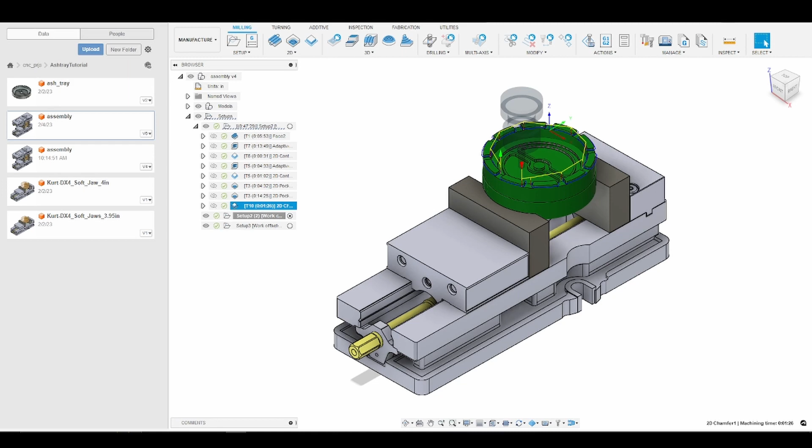So what I'm going to do now is go to my second setup, and I'm going to add a 2D pocketing operation. I'm going to navigate to the tools, go to my Tormach library, and we are going to choose the 3/8 inch Gorilla Silverback. Select OK. Our speeds and feeds are 7,500 RPM, 30 inches per minute. That gives us right at 1.3 thousandths per tooth. Again, 3/8 inch end mill. No chip breakers on this. This is my finishing end mill.

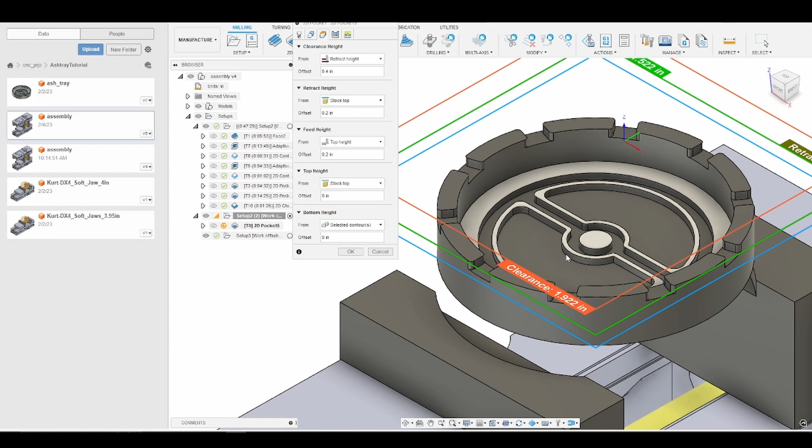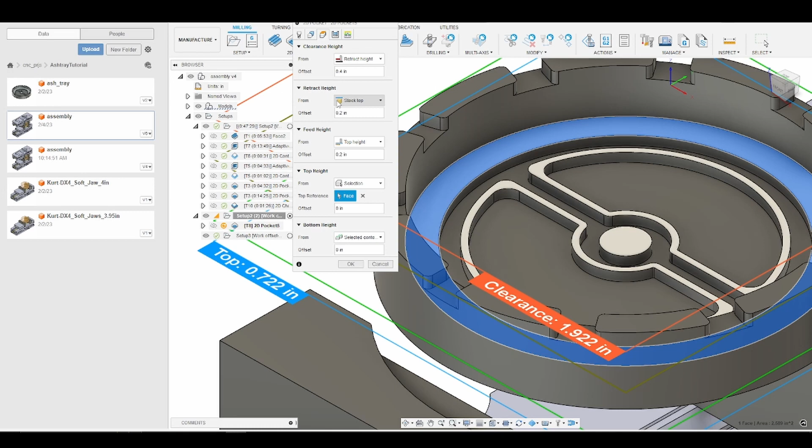So what I will do now is go to geometry. We just want to select the outside of the bottom surface of our ashtray. So I'll select that contour now. We'll go into our heights tab. And again, from the previous tutorial, we discussed a little bit about preventing the cutting of air so that we don't increase our machine time. We know that all the material that's inside of the ashtray has been removed. So for my top height, I'm going to go to a selection and we're just going to select that top surface there. And then we will go to our passes tab.

So I want to perform a finishing pass, and I want my finishing step over to be 10 thousandths. And the next thing I want to do is change my maximum step over to be 50% the diameter of the tool. So I will enter that now. Again, usually keep that between 18 and 75% the diameter of the tool, just to prevent any sort of cusp from forming while you're doing the pocketing operation. We do not want to leave any stock, and we will go ahead and enable smoothing and feed optimization. Okay, compensation type in computer is fine.

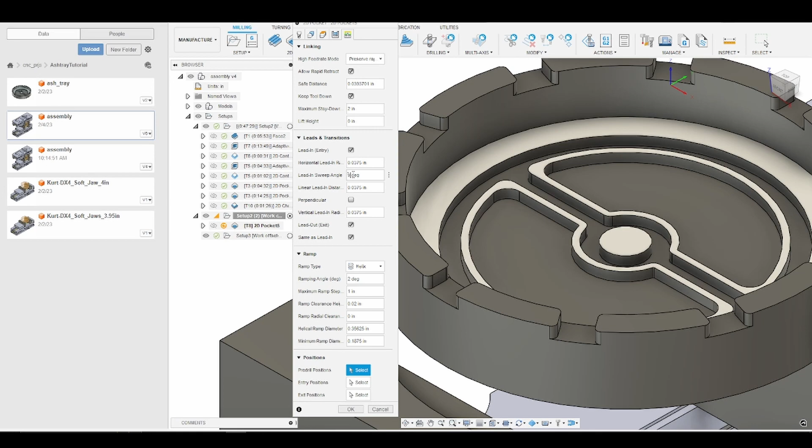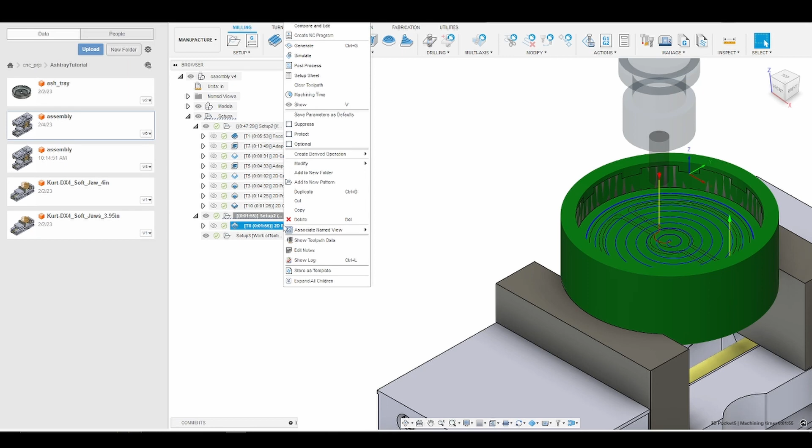We'll go to linking. Again, we will change our ramp clearance height to 20 thousandths, just to minimize cutting air to save ourselves time. And we will change the lead-in sweep angle to 45 degrees and press OK. Our tool path should be generated for us. As you see, it's just a nice clean circular motion. So the end mill is going to helical in about 20 thousandths from the top of our bottom, and then just go in a circular fashion or a spiral out, and then machine the sidewalls and finish it all. So we're going to go ahead and simulate that just to make sure we didn't do anything dumb. Press OK.

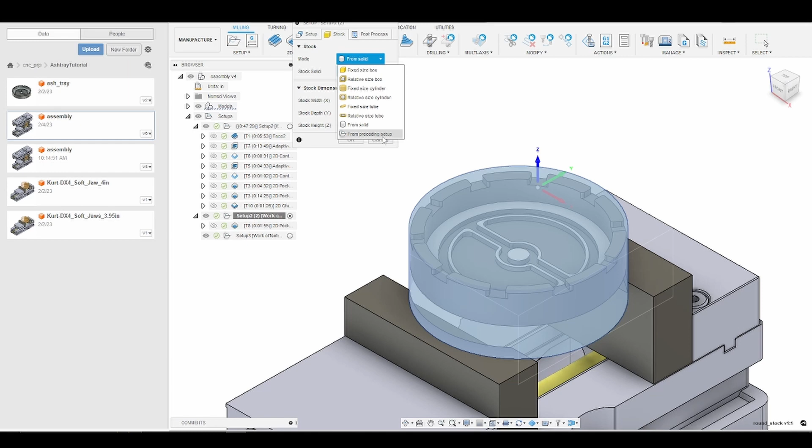And you'll notice that our stock did not update from the previous operation. So what I want to do is just right click in the setup, edit, go to stock, and I don't want from solid, I want from preceding setup. Press OK, check continue rest machining. Okay, and so now our stock from the previous operation has carried over, and so we will go ahead and regenerate the toolpath. And then we will right click and simulate the toolpath again.

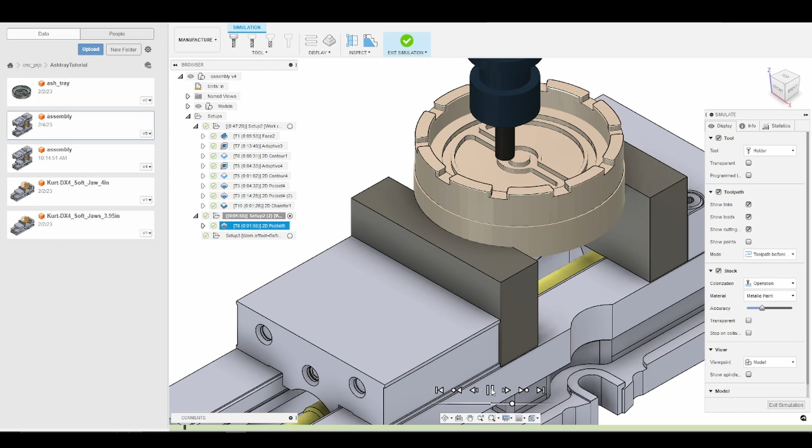And this is why you always want to simulate, so you can find out any sort of mistakes you made before you actually try to machine on your Tormach or on whatever machine you're using, right? We want to prevent from damaging our part, our end mill, or our machine. All right, so now again, the stock updated from the previous operations. We went down, we're just spiraling out, cleaning up the floor, removing any type of epoxy resin that we may have gotten on that top surface while we did our pour.

So if I could go back, I actually wouldn't have done the second op here. I would have moved this cleanup into op 1, because when I used a syringe to fill the Pokeball with epoxy, it went much smoother than what I was expecting. And I didn't get any epoxy everywhere. I thought it would be messy. It wasn't. So we'll have some optimizations after the tutorial series is over, just to discuss what I could have done better. Okay, so that's it for cleaning up the inside of our ashtray. So we'll go ahead and exit the simulation.

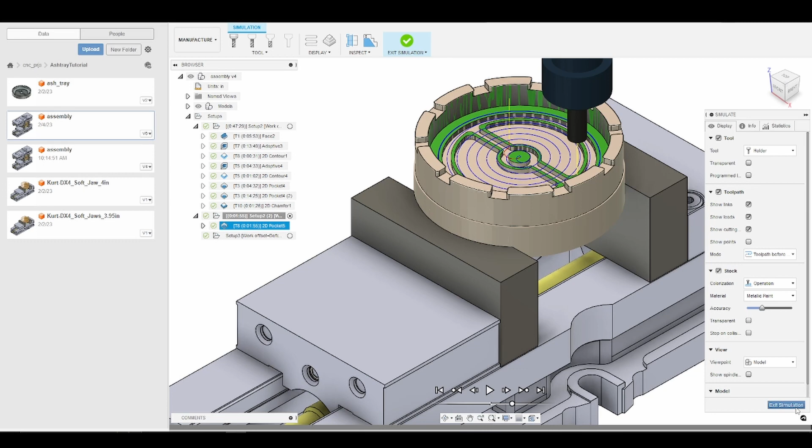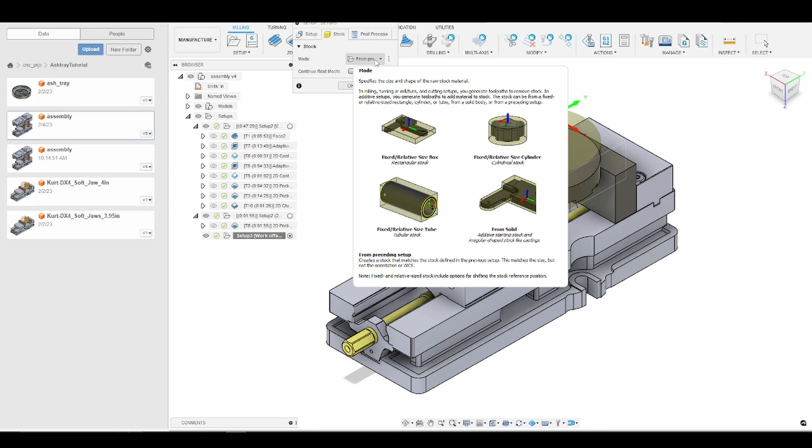And now what we want to do is get into our third setup. So this is where we flip the ashtray and we take the hat of material off the back. So what I'm going to do is just go and edit. I'm going to look at the stock again. We do have from preceding setup. I'm going to enable continue rest machining. Okay, and there's our stock updated.

Okay, so now we will get into op 3 and we're just going to cover the roughing. So we're going to remove most of the material away from the back of our part after we've done the flip. So we'll remove most of the hat of material. So what I want to do is just orbit real quick and show you guys that the probe point is the same for all 3 operations. That is the upper left hand corner of our soft jaws. Just a reminder there. So that's where our work origin is.

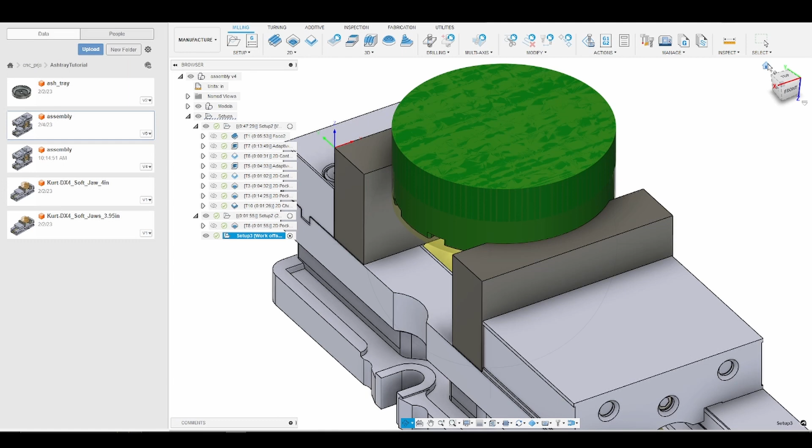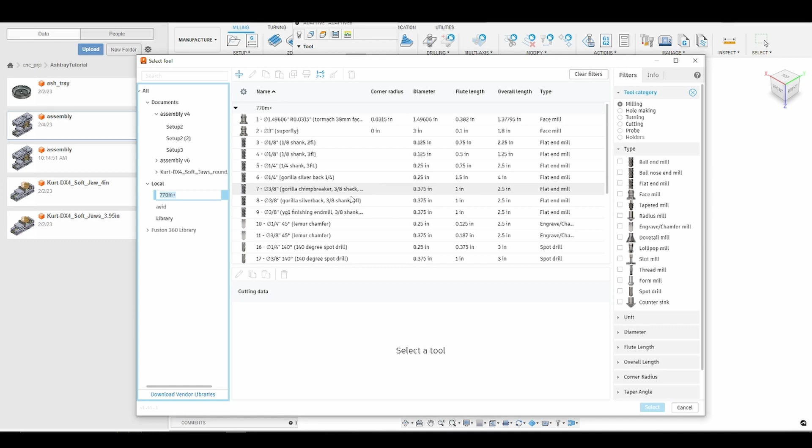And so now what I'm going to do is go to setup and go to 3D adaptive clearing. Okay, so it's a 3D operation, so Fusion will take into consideration our part geometry for us. We'll go ahead and select our tool. I'll go to my Tormach library. As you guys know by now, my roughing tool is the Gorilla Chipbreaker. It's a 3/8 inch end mill, so that's what I'm going to select. Feeds and speeds are 7,500 RPM, 60 inches per minute. And that gives us right about 2.6 thousandths per tooth.

Again, it's a 3D adaptive clearing. We can jump over to geometry. We're going to change our heights. So our top height is going to be the stock top, which is correct. We want to remove most of the material from the top of our part after we flipped it. Now we have to be careful with our bottom height, right? That's actually telling Fusion 360 we want to mill all the way to the bottom of our part after we flipped it, which is not what we want. We actually want it to be the model top, so the top of our ashtray after we have flipped it.

We will go into our passes tab and we will change our optimum load to 30 thousandths. Okay, so everything there looks fine. And what I'm going to do is we will leave 0 stock on the sidewalls, but we will leave 20 thousandths on the top of the ashtray, just so we can come in with the shell mill and try to get a smooth finish. Okay, we'll now go into linking, and I will change the ramp clearance height to 20 thousandths. Just try to prevent cutting air to save us time.

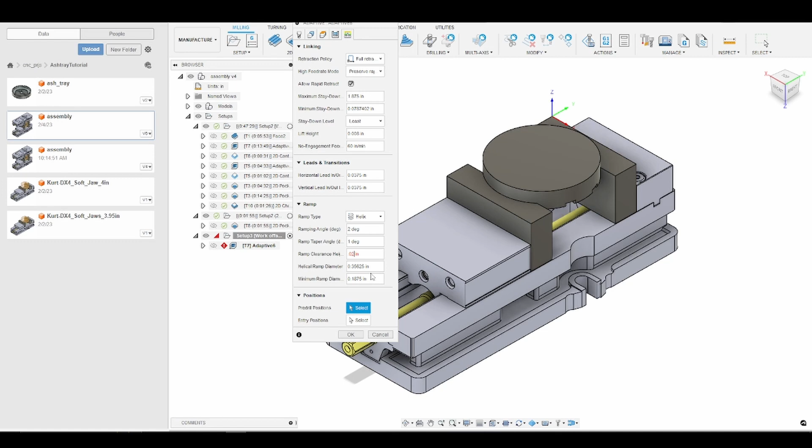Okay, everything looks good. I'm going to press OK, and Fusion should calculate the tool path for us. It's a nice circular motion. We'll go ahead and simulate just to make sure that, again, we haven't done anything that could damage our end mill, our part, or our machine.

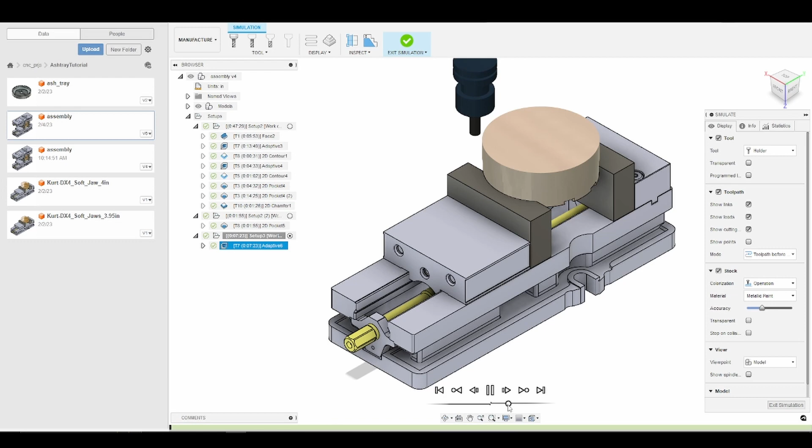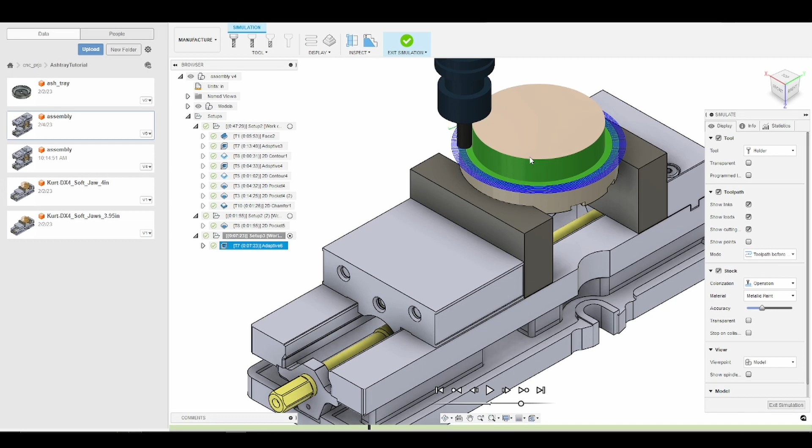All right, so I'm just smoothing along, and let me stop it here for a second. You can see that the top hat of material, that's a lot of material I'm removing. And that's because, again, I buy my stock at this point in time pre-cut, so I buy it oversized so I can do multiple projects with one size stock. So we are wasting a lot of aluminum there, but nevertheless, we are building the ashtray. So I will go ahead and continue, and I'll speed it along.

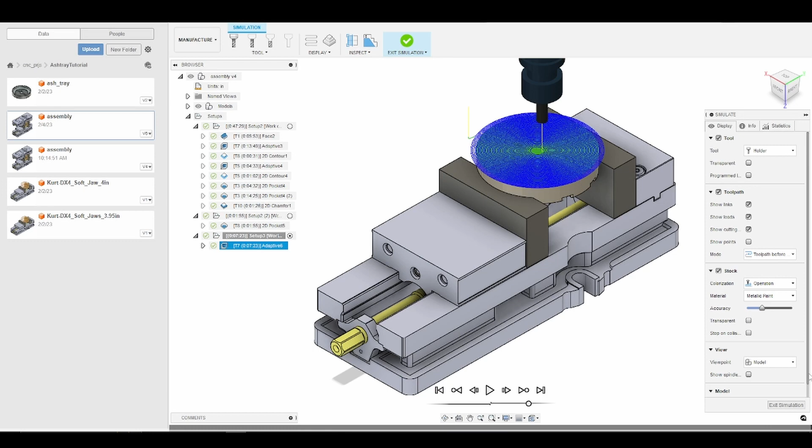So that is it for, again, cleaning up the inside of the ashtray for op 2 and moving into the op 3 setup, where we go ahead and remove the top hat of material. So now I'm going to exit the simulation, and what we'll do is we'll go ahead and jump into the machining on the Tormach, and there'll be one more tutorial after this where we go ahead and we finish up the third op, where we're just going to use the shell mill to face and then chamfer around the edge to make sure we break any burrs or get rid of any sharp edges.

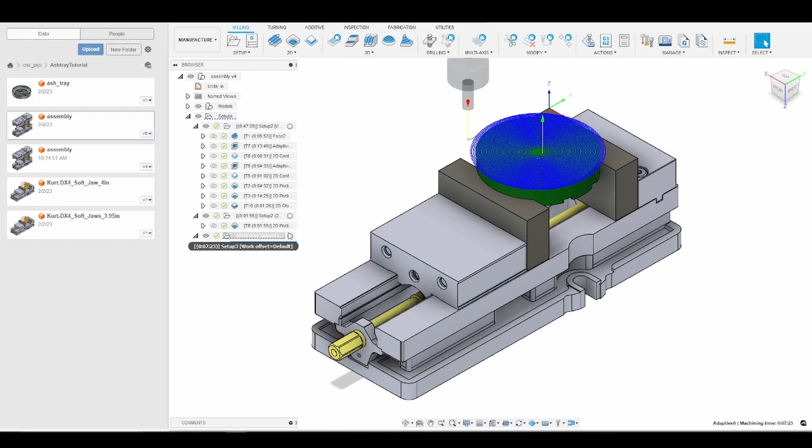All right, so now we're going to go ahead and clean the inside of the Pokeball. So you'll notice the epoxy resin is poured. It looks nice and smooth, no issues there. Again, I used a syringe to get the epoxy inside of the channels that make up the Pokeball. We're just using that Gorilla Silverback end mill, just cleaning up any imperfections I may have left, and then also finishing up the inside sidewalls.

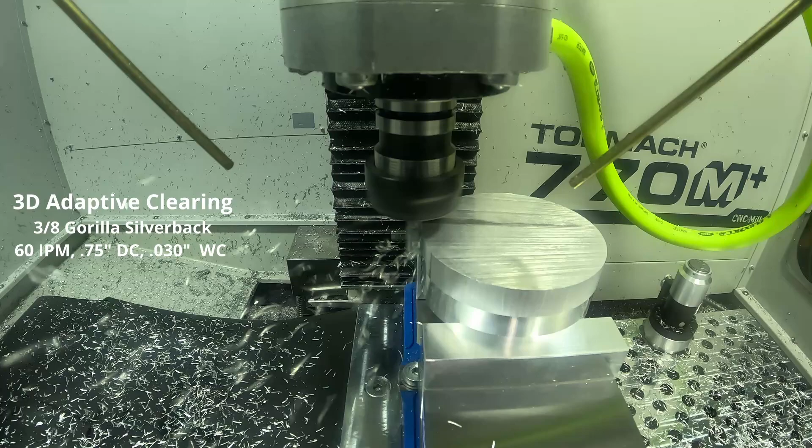So now we're going to go ahead and use our Gorilla Chipbreaker to just go around the outside and clean up or rough out most of the top hat. Again, this is the 3D adaptive clearing, so we're just trying to go around and remove as much material as we can as fast as we can. Again, you notice the top hat on top of this ashtray is rather large, and again, that's because I buy my stock pre-cut so I can use the same piece of stock for multiple projects. So again, it's just kind of soothing to watch all the chips fly.